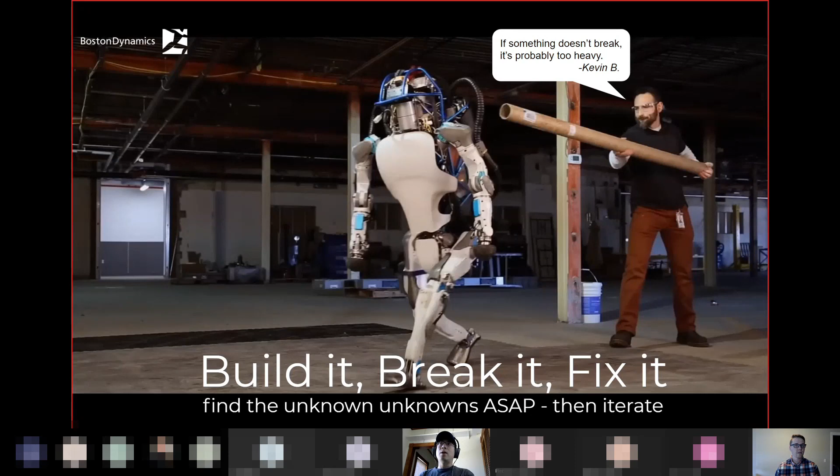So, build it, break it, fix it. What does that actually mean? I think it comes down to finding the unknown unknowns ASAP and then iterating to fix them. If you think about that, for me that means: let's find the fastest way to get to a prototype that has some reasonable amount of confidence that it'll work, so that we can begin testing.

One of the challenges is determining when you've done enough analysis to have confidence. You might find a point in the design where you're spending a lot of increased time analyzing something, and the benefit or the answers you're getting from that time spent isn't really worth what you're putting in. That's the point in the design where it's good to transition away from analysis and more towards trying to get something built and designed so that you can test it.

Particularly with a lot of the things that we do, there's not really any amount of analysis or simulation that will capture everything. A lot of our loads are driven by crashes, which are really unpredictable, random, and often have to do with the surface that you're crashing into. So surface stiffness is really important, and that's something that's really hard to model.

If you're familiar with our robots, we do a lot of these mobile robots, so we're always kind of in a situation of being on the edge of over-designing. And that's a risk of losing the athletic strength-to-weight ratio that has been a hallmark of many of our machines.

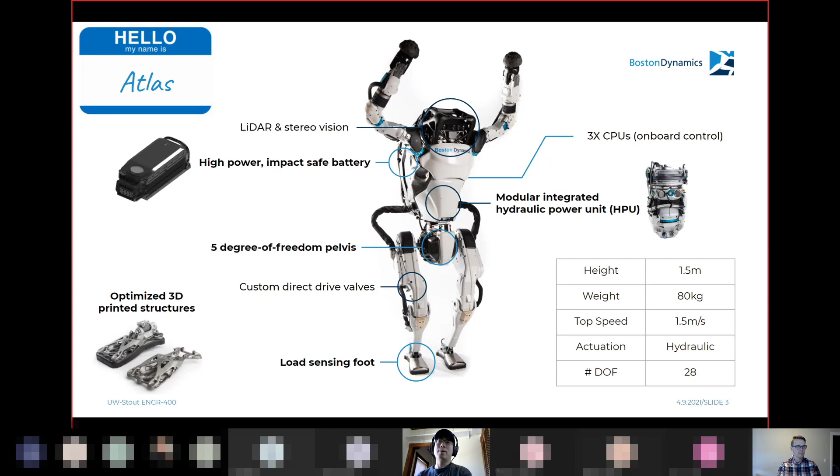Back in 2018, I was issued a challenge by the Atlas team, and that challenge was to increase the hip strength by 2 to 3 times while staying mass and volume neutral. That's a key requirement that made the design really hard. And oh, by the way, while we're redesigning this, let's increase the range of motion by 1.5 times too, along with all those other things.

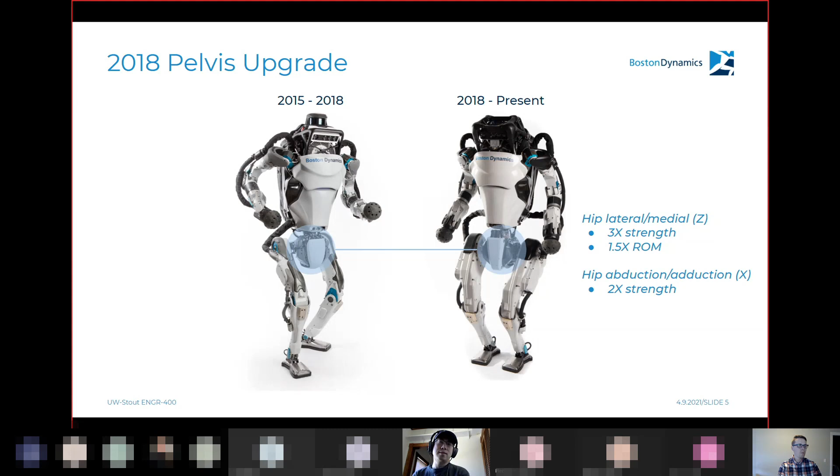If I show what the robot looked like prior to and after that upgrade, with the pelvis highlighted, you'll see that we got 3 times the strength in the Z direction, and we hit that 1.5 times the range of motion. We also got 2x in the X direction. And to spill the beans here, it isn't a coincidence that the final design met these design metrics. You'll find out why as I go through this talk.

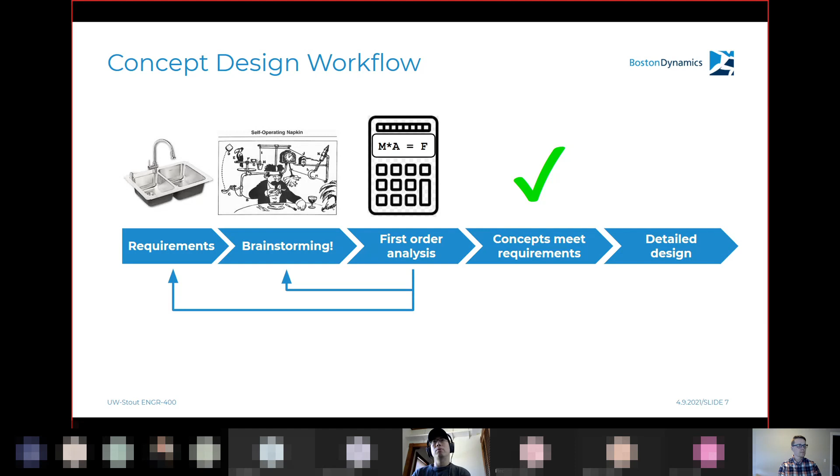So how did we do it? Well, unfortunately, the answer isn't magic. Or maybe it's not surprising that it's not magic, but instead this really methodical design process. I'll walk through each of these steps as I go through the following few slides.

The beginning of any design is defining the requirements, trying to figure out what am I actually designing. The key part of this is to talk to customers, stakeholders, your business development and marketing team, and try to figure out what this thing needs to do. In the context of this pelvis design, that was really driven a lot by the controls engineers. This was prior to when we started doing all the parkour behaviors you've seen on YouTube recently, and we needed that 2 to 3x in hip strength to do those types of things.

That mass and volume neutral requirement is very important. As things get bigger, they tend to lead to more interferences with the limbs as the arms and legs are doing things and moving through space. If we pick up a lot of mass with this upgrade, then we're kind of losing that strength-to-weight advantage that the new design was supposed to provide.

And then there are a couple of other key requirements that were kind of just brought along for the ride. You know, the previous design had a spherical hip. It also had a relatively flat torque curve. Those things are kind of controls conveniences that the controls engineers really wanted to maintain.

And then there's additional ask from the team lead, and that was to keep the existing interfaces. Make sure that the legs and the torso can still bolt to this new design without having to redesign those things, because if we didn't keep that backwards compatibility, that would lead to a design spiral, and we simply didn't have enough people to revisit all those interfaces.

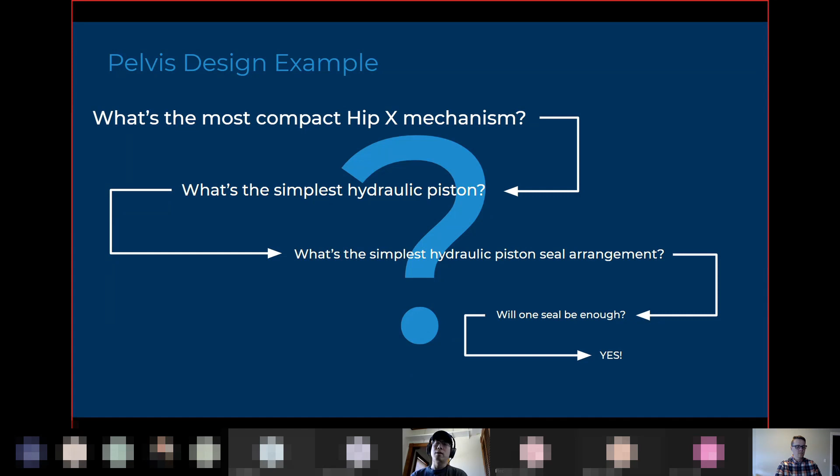So once we thought about that, we asked, is one seal enough? And the answer is yes. Once we knew one seal is enough, that led us to designing the smallest, simplest piston, and that in turn allowed us to design the most compact hip X mechanism. That's just an example. You can apply this to almost any design problem you'll see, and it'll definitely help you get unstuck and move along the design toward solving the bigger problem.

Okay, so once you have some concepts, a key thing to do is to eliminate the weaker concepts ASAP. If you're having trouble proving whether or not a particular concept will work, maybe another way to look at it is to see if you can prove that another one will fail.

This is a thought process we picked up while part of Google X, around 2014, when Google bought Boston Dynamics. After a little bit of confusion, we were put under the X division. This is one of their guiding principles: try to find out how quickly you can determine that something will fail. And if it turns out it will fail, don't spend any more time or resources carrying along that concept. Focus on the ones that still look promising, that still have merit.

Once you have a couple of concepts that pass the sniff test and look promising, the next thing to do is take a quick first pass at sizing and analysis, just to see if things will still work. Does it still have merit? You don't want to spend a lot of time digging down at this point in the design phase. Just use simple equations, textbook equations you've learned here at UW Stout in your engineering classes. That's the level you want on the first pass, because you want to find out as quickly as possible which ones don't work and which still have promise.

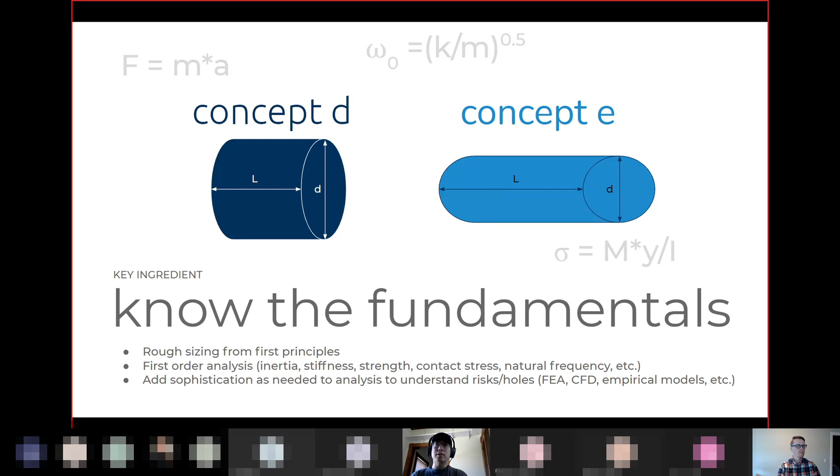Important things to think about: inertia, stiffness, strength, maybe contact stresses, maybe just some basic bearing analysis—what do the bearings look like, are they going to be too big, natural frequency. So parameterize your design or the different concepts in the same way, apply the same equations to them, and see how they shake out relative to one another. Only add sophistication to the analysis if you really need it to understand risks or holes in the design.

Another top tip related to that is to create your own design tools. We do a lot of MATLAB, spreadsheet type things. One of the real benefits of creating your own tools is that you understand what is being modeled—you know what all the assumptions are. You're not working with a black box trying to figure out all the things that are or are not included. This also helps you develop design intuition.

On this pelvis design, I wrote a MATLAB script to help me size different mechanisms. That was a lot faster than going through SolidWorks and using the kinematic tools to see what the torque curves were. I could just change a parameter, hit run, see what it looked like, and that really helped me develop a lot of insight into how these mechanisms should package relative to one another.

Another really important thing about these simple analysis tools is that they help you sanity check more sophisticated analysis down the road. If you're doing FEA, there can be a lot of issues—garbage in, garbage out. So as many checks as you can incorporate into future, more complicated analysis, the better. It helps you build confidence that what you're looking at is correct. Another benefit is that if it's a tool you created, you can probably wrap an optimization loop around it—things that are really hard to do if the core piece is a black box. So I highly recommend creating your own design tools when approaching a design.

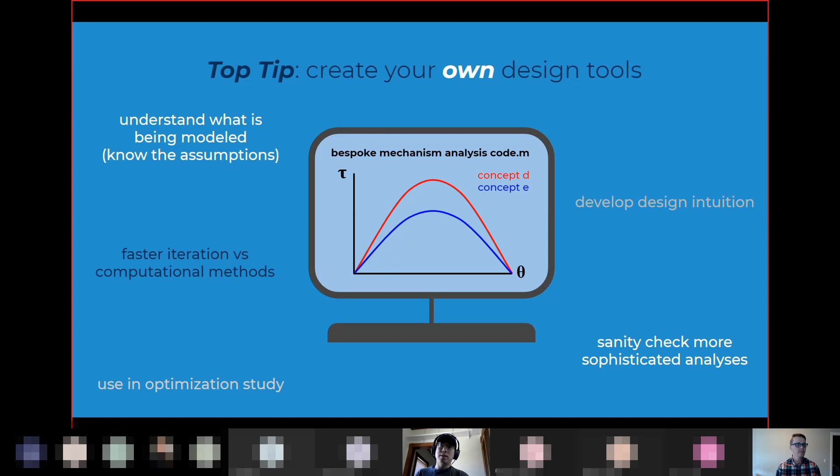That relates to this next top tip, which is to sanity check your results. Something I always do when working through equations is check my units. Is that consistent? Does power in equal power out? Do I have conservation of momentum, conservation of angular momentum? The more things you can check along the way, the more confidence you build.

That what you're doing is correct, and that if you're using the results of these analyses to drive your design, your design is correct. Another example of that is FEA. Let's say we're exploring the strength in a really complex organic hydraulic tube in the manifold of the robot. Start with simple hand calcs, like a thin-walled pressure vessel and hoop stresses.

Then as you start your FEA, try to pick out a straight-ish section of that long line and see, do the stresses there match your hand calcs? If not, maybe your assumptions are wrong. Maybe I need to look at the thick-walled pressure vessel calcs. Or maybe there's a problem with my analysis, maybe my mesh is too coarse. So lots of things like that.

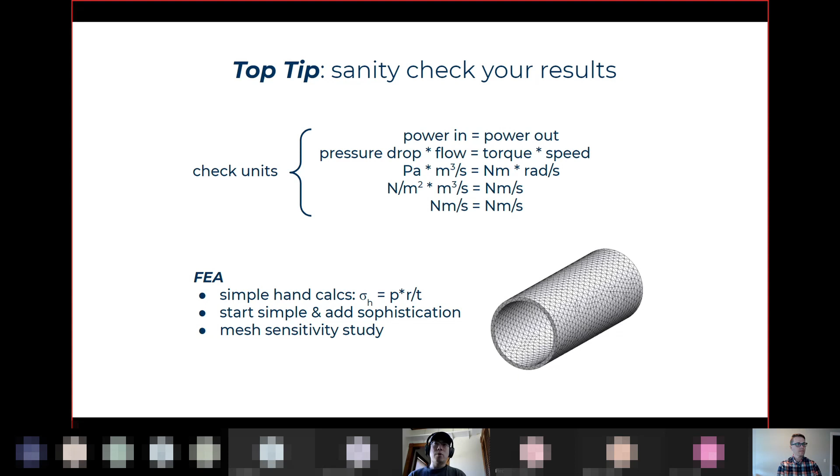Just always check your work. Always make sure everything's consistent. You really need to build confidence in this stage of the process. Otherwise, the things you're proposing won't work the way you expect.

Here's a quick aside on maybe one of the hardest parts of the job, and that is to not be attached to your own concepts or ideas. This is hard for everyone, because everyone wants to see their idea end up on the robot. But really the danger here is holding on too long to unsuitable concepts.

It wastes time and resources that are better put on a more promising design. So it's really important to be objective and honest when evaluating ideas, especially your own. It saves you a lot of headache down the road. Don't hold on too long if it's obvious your idea isn't the right fit, and don't go down the wrong rabbit hole, because you'll end up being late getting your design into the hands of your customers.

All right, so we just did all this work. We have hundreds of napkin sketches of Rube Goldberg devices and MATLAB scripts to size all of them. Well, what do we do if none of these concepts meet the requirements? The tongue-in-cheek answer is we change the requirements. But it's not as simple as crossing off the requirements you don't like or that don't fit.

My experience has been that in the initial requirements-defining stage, that's kind of like the kitchen sink. It's not just the critical must-have requirements included, but there are a lot of nice-to-haves that other people might want, that maybe aren't absolutely necessary but get bundled in initially. And it's these design challenges, as you go through this first-pass analysis stage, that force some difficult trade-off discussions.

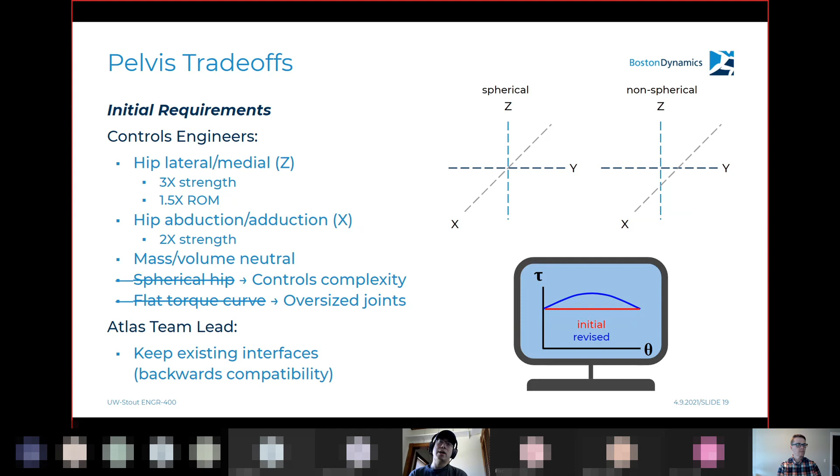All right, so once we have one or more concepts that meet the agreed upon requirements, then we move on to detailed design. And this is what detailed design looks like, at least in my opinion.

You start off with detailed analysis, and that's where you'll do stuff that you might be a little bit more familiar with, like FEA. Also important to identify any holes or risks in the design. Once you have those things figured out, it's really important to think about DFM, DFA, design for manufacturability, design for assembly, making sure that your design can be made real. Once you have a good idea of those, then it's important to have design reviews to get a larger audience to poke at your design and look for holes or risks, and then build a prototype.

So let's talk about all these things in a little bit more detail.

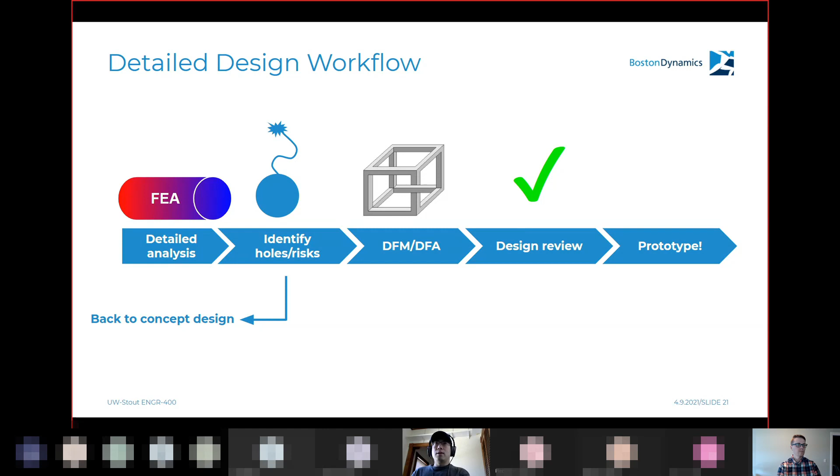In detailed analysis, it's really important to get the details right. There are so many different types of details to get right that this is a really big challenge of any design. So many things to consider, like thermal expansion—will your design seize when it gets hot or leak when it gets cold? Cable routing—if you don't think about that and you have a lot of dynamic cable bending, that could be a failure point that leads to a lot of pain, especially if cables are buried deep in the design and hard to access.

Other things that are important: galling hardness. If you don't pick the right materials, you can have things that gall and seize as you're threading them together. So these are all things that are super important.

A lot of these come with experience. So if you're looking at a design and you're not sure if you can answer the question yourself, don't be afraid to ask for help. Seek out more experienced coworkers. Sometimes component vendors, like bearing manufacturers, can help out with more detailed analysis, so don't hesitate to reach out to vendors for advice. The real key point here is that you might have the most clever design in the world on paper, but if you don't get the details right, it's not going to work in real life. As the saying goes, the devil is in the details.

After you've done some analysis, taking a closer look at some of your concepts, you really need to plug any holes that turn up during that phase, whether that's with rapid prototypes, getting things made physically so you can see how things fit together, or if they will fit together, or how they move. In our current modern era of design, where 3D plastic printers are really common, take advantage of that.

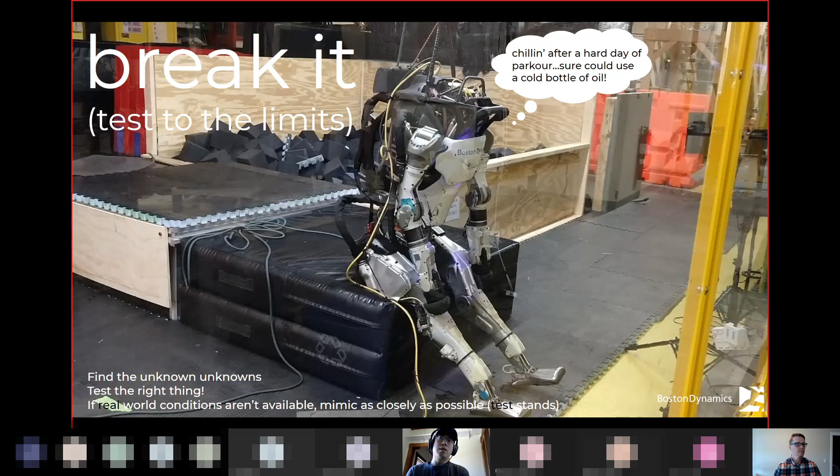Here's what a typical day at the office for Atlas looks like. I'll play this, hopefully the sound works.

And that leads us to fix it, which is iterate, iterate, iterate, iterate. The important thing here is to really identify the actual root cause. It's really important to understand why something failed and how it failed. I think the key is that many quick iterations, at least in our experience, is much more productive than a single extended design cycle where you spend too much time even on the analysis phase and don't have many opportunities to learn from the testing process in the real world and finding those unknown unknowns.

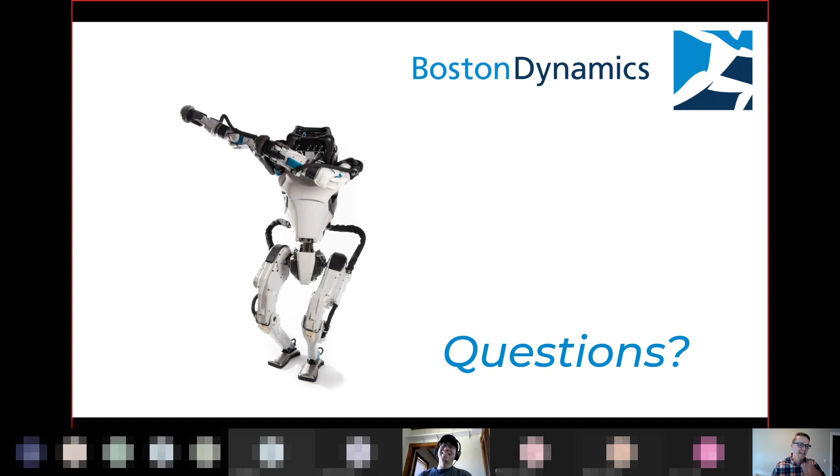To be honest, I'm patting myself on the back right now for inviting you to come as a speaker, because that was really an incredible presentation, especially for a group of mechanical engineers to hear about. I don't think I'm exaggerating when I say that myself and others will probably refer to this video and use it with our classes and students in the future, because you really touched on a lot of points that we think about all the time, and the things engineers need to know as they prepare for their careers. I think this was a really valuable, succinct way to put all those things together and say, literally, here's how you be an engineer. I appreciate that. So thank you so much for really a great presentation.